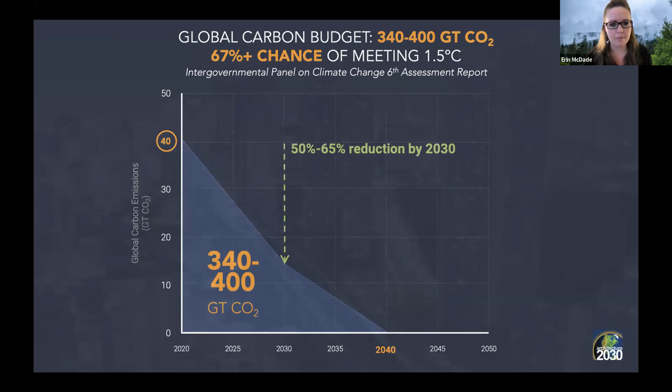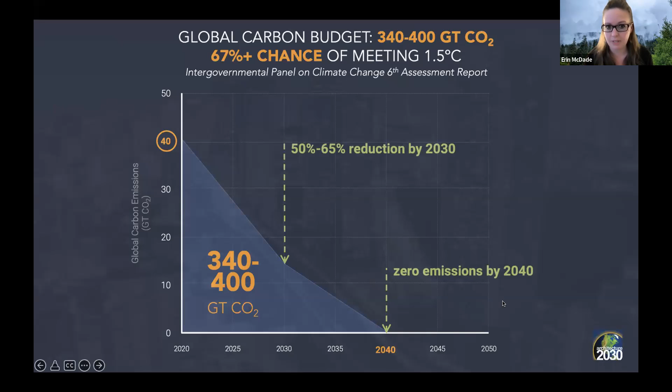So instead, what we are aiming for here is a zero by 2040 deadline, with about a 50 to 65% reduction within the next decade, and then getting us all the way down to zero by 2040. And you can see that if we do this, we hit exactly on that target for 1.5 degrees C. Moral of the story, of course, is that the sooner we get to zero, the better, and 2050 is objectively too late.

Now, the flip side of that climate clock is what they call the lifeline, and that is renewable energy. That is, making sure that we're meeting all of our energy demand for buildings, transportation, industry, et cetera, with clean electricity. And we can see from this that currently the world is getting about 12.2% of our energy from renewables. So we clearly have a lot of work to do, but also a lot of opportunity, right?

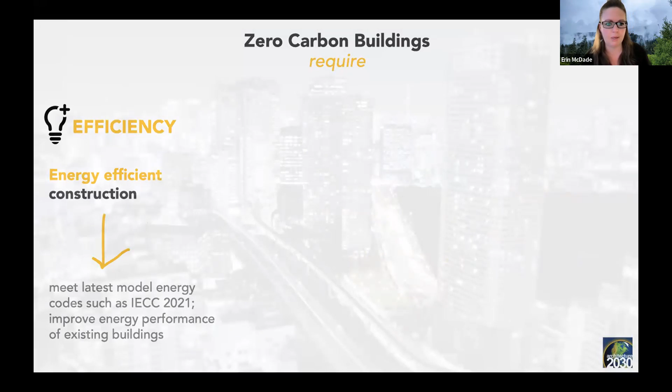So when we're talking about zero carbon buildings, all zero carbon buildings, whether it's new construction or existing, are going to require the same three steps to achieve zero carbon. So the first one is the one we're probably all most familiar with, which is energy efficiency. And so from a new construction perspective, energy efficiency might mean meeting the latest model energy code, such as IECC 2021. I know you're working in Michigan on getting IECC 2021 adopted. And for an existing building, it would be doing an energy upgrade and improving the energy performance.

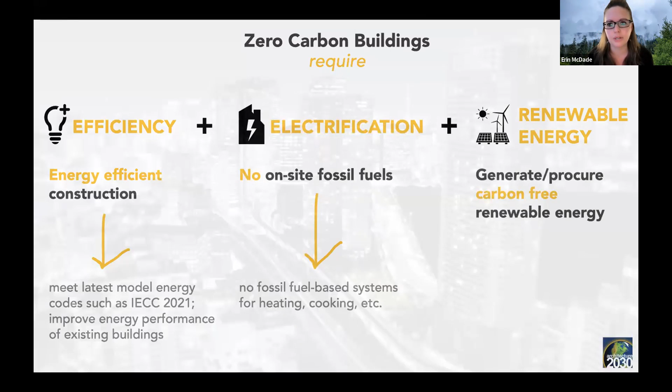Then the second piece, which again, we've all been talking about a lot, is the electrification piece. We can't be zero carbon if we're combusting fossil fuels on site. So using electric appliances in place of fossil fuel appliances. And then the third piece is this renewable energy piece. Once we've gotten the building as efficient as it can be, and we're making sure there's no fossil fuel combustion on site, the energy that we are consuming needs to come from a clean source. And so that is where the generation or procurement of renewable energy comes into play. And this is really the sweet spot of the Zero Code renewable energy framework.

So from a designer perspective, if a policy were in place where designers were required to meet the Zero Code, how does this work for them? It's actually not that complicated. It's set up to be pretty easy. So the first, following those three steps again, design an energy efficient building. And again, the Zero Code is compatible with any energy efficiency code that a jurisdiction wants to use, but is in particular designed to be compatible with IECC 2021. So a designer would meet code, a basic designer requirement anyway. Then we need to determine the renewable energy requirements of that building once it's met code.

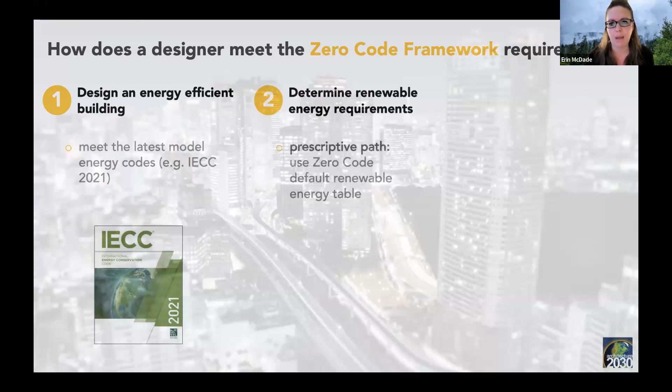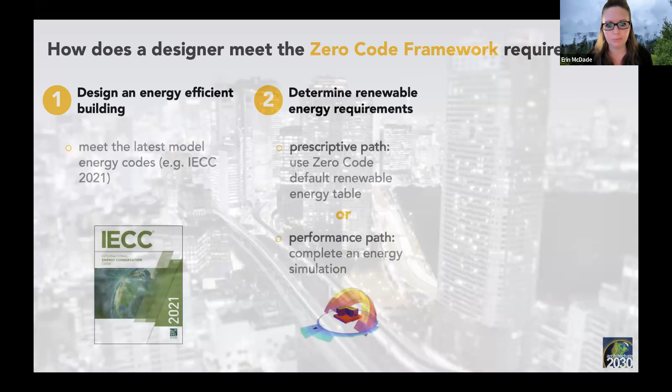And the zero code framework offers 2 different pathways for doing that. There's a prescriptive pathway where the zero code framework comes with a default renewable energy table that tells you, based on your climate zone and your building type, how much renewable energy your building needs to generate and or procure on site. Or, of course, performance path, energy model, figure out how much renewable energy is needed.

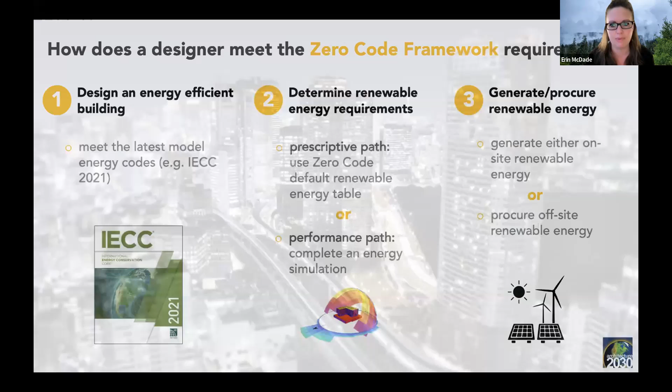And then the next step is just to generate or procure the off-site renewable energy. And obviously that part in and of itself is somewhat of a challenge depending on the geographical and jurisdictional conditions. And so this step 3 of supporting designers in knowing what and how to procure that renewable energy is where the zero code framework is really set up to help policymakers to establish that part and make that part as simple as possible. So I'm going to talk about the resources now here that are really for policymakers and advocates around the zero code for establishing that renewable energy framework within your jurisdiction.

So the first set of resources we have are what we are calling these zero code guide documents, and they're up on the website. I'll put the URL up in a second. We have a series of these that we have developed and a series that are still in development by the Zero Code National Team. The first one, what is the zero code, is just a high level, fairly short talking points memo about the key points of what the zero code is and what it can do.

The second one is the pathways to zero code adoption, and I'm going to highlight this one in a second. But this is one that jurisdictions are finding incredibly valuable, especially at the beginning of this conversation, because despite the fact that we are typically used to regulating this kind of thing through a building or energy code process, there are actually a bunch of zero code adoption pathways outside of the building and energy code process that jurisdictions can and have successfully utilized, including in Boston. And we'll get to hear about that in a little bit more detail from John in a couple of minutes.

And then we also have a guide document on the economics of the zero code, looking at how it impacts costs and what the potential economic benefits for a jurisdiction of implementing a policy around the zero code framework would look like. And then finally, a similar guide document looking at health and equity and the benefits of the zero code from that perspective. And so all of these are online, all of these and more, I should say. There's a whole host of additional resources online at zerocode.org/resources.

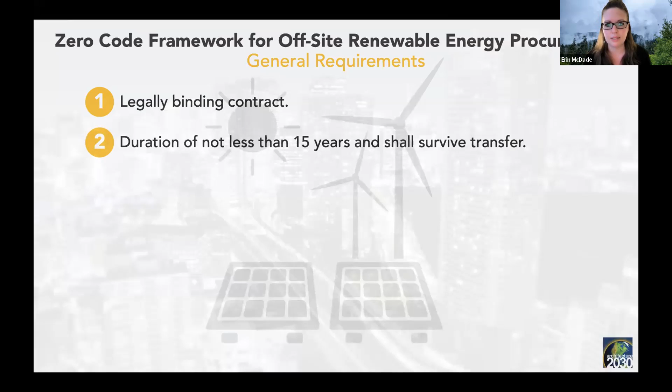So within this technical support document, one of the first things that it covers is the general renewable procurement requirements. And so what this looks like are, regardless of the type of renewable energy that's being procured, the general requirements that we would recommend a policy have in place. And so that includes that the procured renewable energy is in a legally binding contract with a duration of not less than 15 years, and that the RECs or other environmental attributes are assigned to the building project for the duration of the contract, as opposed to being free-floating in the market.

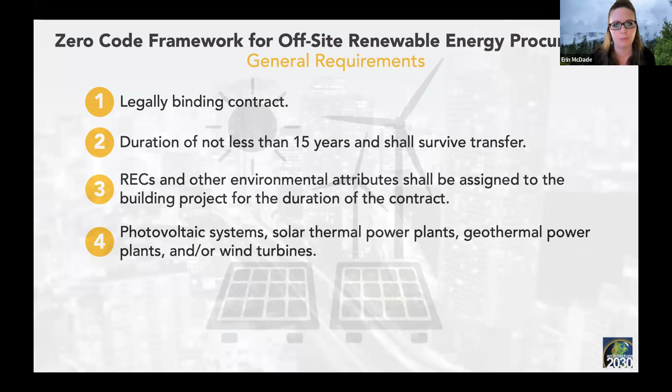There's some consideration about the types of generation that are considered best for renewable energy procurement, that are considered actually to create carbon-free, environmentally friendly energy. The requirement that it's located within the same or an integrated grid service area. And so essentially this is ensuring that additionality, that addition of renewable capacity is within the building's general service area, so it's actually supporting the grid that the building is drawing power from. And then this one's pretty clear, transparent accounting that clearly assigns the production to zero. And John will talk a little bit about how some of these implement from a real world policymaking perspective.

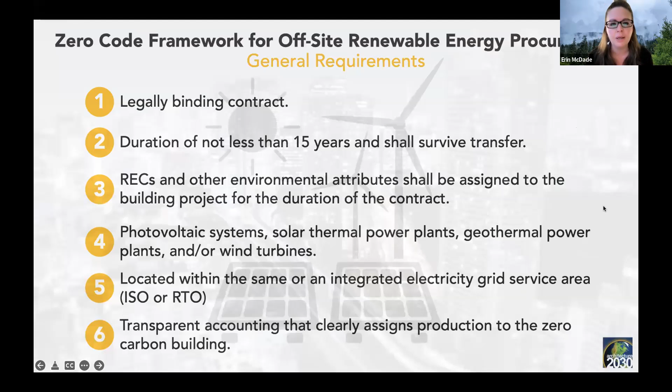And I will say that while these are general requirements, the Zero Code is designed to be plug and play. Everything's already in place. It can be just implemented as policy, especially if coupled with IECC 2021, but it's also super flexible. And so if, for example, located within the same service area becomes too much of a barrier for a jurisdiction for some reason, requirements can be shifted.

So general requirements regardless of the type of procurement, but then a bulk of this document is an in-depth analysis of the actual types of offsite renewable energy procurement that are available to most jurisdictions, and that the jurisdiction is going to be choosing from to make either applicable to buildings within their jurisdiction or not. And I'll quickly list those. I'm not going to go into detail about each of them, but again, there's significant detail about each of them within this document. So it includes direct ownership, community renewables, more commonly known as community solar, power purchase agreements or virtual PPAs, renewable energy investment fund.

This one is actually one that is unprecedented, except for perhaps what John will be talking about a little bit in Boston. We might get to call the first precedent of this. So it's kind of a new concept that the Architecture 2030 team developed in writing the Zero Code, and it's very similar to what we see in a lot of jurisdictions if there are legally mandated affordable housing requirements for developers, and in lieu of building that affordable housing, a developer can pay into a fund that the city ostensibly then uses to build affordable housing elsewhere.

A comparable approach can in theory be taken here, where in lieu of a building purchasing renewable energy, money can be put into a fund, and then in theory that fund would be used to power other clean energy projects. It could be used even to help overcome the upfront cost barrier of existing building electrification for low-income residents, as an example. We also have direct access to wholesale markets, and then green retail tariffs. And then finally, probably the one that most people are actually familiar with is unbundled RECs. Also the one that is probably the least effective type of offsite renewable energy for various reasons. And I'll go into the details of that a tiny bit in a second here.

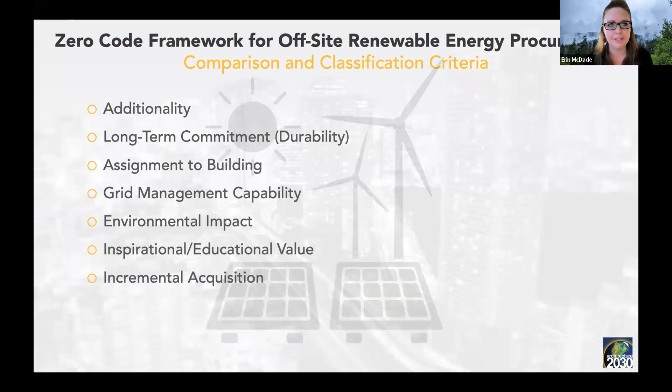The long-term commitment, we talked about the recommended requirement of having contracts be at least 15 years so that buildings can't just opt out. The assignment to the building as opposed to free floating in the market, grid management capability, environmental impact, inspirational and educational value, incremental acquisition ability. Again, all of these are defined in more detail in the technical support document, the ability to have permanent financing.

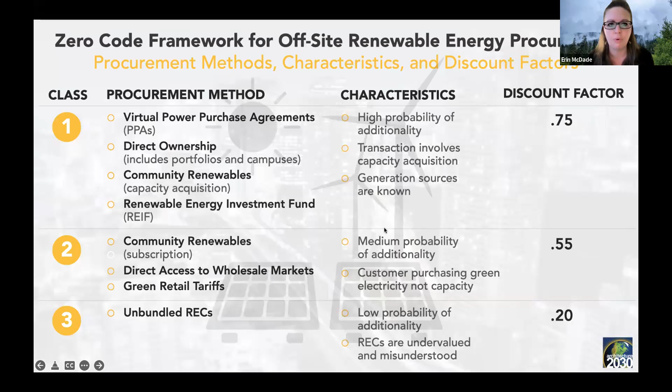So, and I personally, and we at Architecture 2030 think that's completely fine as well. And it's good to have this back end information to understand the impact that these different procurement methods and the renewable energy as a whole is going to have in the jurisdiction.

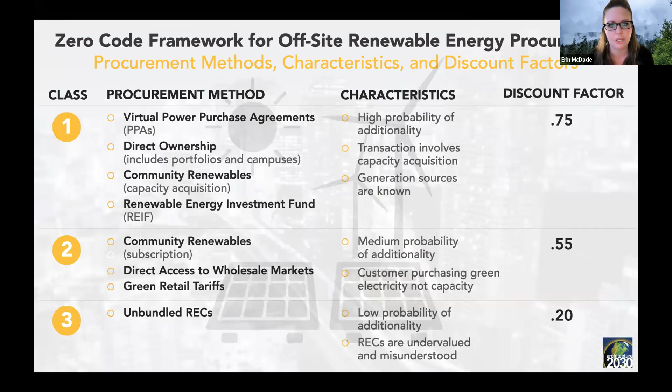And so I'm going to end on really quickly talking about maybe the most simple and plug and play use of the Zero Code framework. And I already mentioned this. So the Zero Code is built into the newest version of IECC 2021 as Appendix CC, which is the Zero Energy Commercial Building Provisions Index. And so what that means is that if a jurisdiction adopts IECC 2021, they can adopt that appendix as well, either as optional or as mandatory.

And either way, optional, it would be incentivized, mandatory obviously would be required, would then be bringing that offsite procurement piece into the energy efficiency elements of the IECC as well. And so just some key features of Appendix CC, again, especially since that's part of the conversation in Michigan. Optional, I talked about, if it's adopted, regardless of if it's optional or mandatory, there would be mandatory compliance with the 2021 IECC, and then the renewable energy requirements built in there if it's mandatory.

Talked about this one, sets a minimum renewable energy requirement based either on a default table, which is in there, or energy modeling. Provides incentives for buildings to be designed to be more energy efficient than code requirements. The more energy efficient the building is, the less renewable energy it has to procure, and the more affordable that renewable energy is. So it incentivizes designers to find that balance point between energy efficiency and procurement.

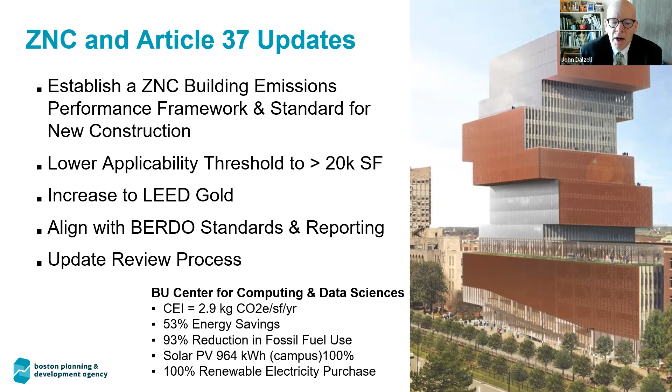Real important for all of this work is we have an existing building emission reduction ordinance, affectionately referred to as BERDO. We also updated this to a carbon performance standard. So for existing buildings, we have requirements that establish carbon emission limits. There's a range of limits depending on the building use, and the limits decline over time. It's scheduled out through 2050, where it reaches zero net carbon for all buildings.

But we know existing buildings, in Boston especially, where they can easily be 100 and 150 years old, present a lot of challenges. New buildings present a lot of opportunities. I'm not sure I can really say that, but in our new building work, we have been able to focus on high performance much more readily. It's obviously a blank slate, and so we have open decision-making opportunities.

Really important, though, is that we're not doing this alone. We're doing this in partnership with our building owner, design, and engineering community, our development community. And so we've been able to work in partnership and really learn from practices that are happening right in Boston.

And so today, by the way, we've yet to finalize our zoning. We're sort of 7/8 of the way through the process. We've drafted our zoning and recommendations and things like that. But more importantly, we've already been applying the framework and practices.

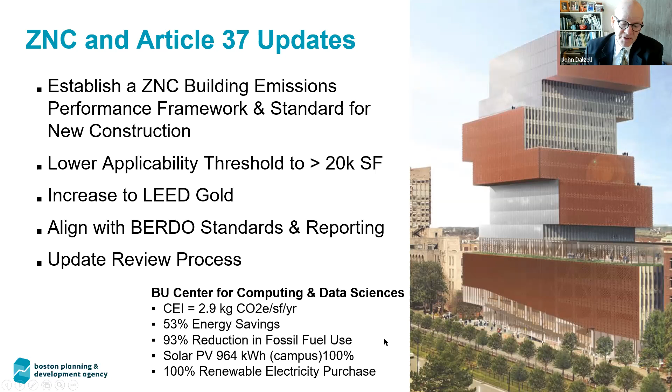I actually think that's wrong. I think this building is now 100% electric. BU already purchases all their electricity from a renewable resource. But just to be in line with our goals, they're actually adding new on-campus solar renewable energy to fully electrify this building or meet its full electrification loads.

We have other projects in the city as well across different housing typologies. And interestingly enough, I really want to give a big salute to our affordable housing development community. They've been at the forefront of practice. I think they really do understand the health benefits of green buildings, but they also understand the value of high performance buildings, especially as it pertains to costs that are passed on to tenants and occupants.

Bunker Hill Housing is a large redevelopment project. There are several buildings there, but without spending any additional money, they were able to design buildings that will achieve LEED Gold. They've cut the energy in half. I don't know if any of you are familiar with multifamily residential practices, but an energy use intensity of 19 is pretty remarkable. And I have to say, we're seeing projects beat that now. We've just signed off on a project with an EUI of 12, and it's not doing anything all that remarkable, just getting a little bit smarter about the synergies between strategies.

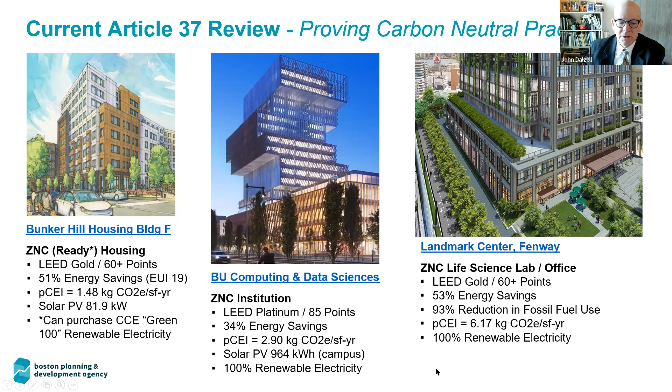The BU building I mentioned, and now, here we go, one more click here. And we also have, especially right now, because life science building development is probably our predominant building type of new construction in the city, recently signed off on a couple of life science buildings where they've been able to achieve 50% energy reductions, LEED Gold or better, and significant reductions in fossil fuel. They've also committed to 100% renewable electricity. So we're seeing great things out of our partners in the city and are able to move forward.

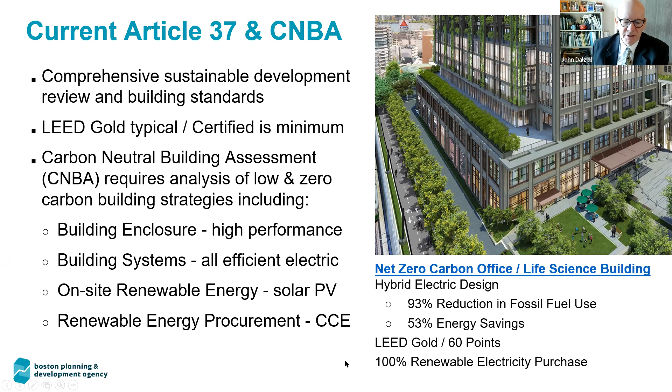Just as a little more background, we have advanced practices under current zoning and regulation. So as I said before, we typically see LEED Gold. We take a comprehensive approach to sustainability. And a few years ago, as we focused on zero net carbon, we introduced a requirement that buildings do a carbon neutral building assessment. This is a great way to start policy, by the way. It doesn't have any formal performance requirement to it. We simply asked projects to assess additional strategies to reduce energy use, or in our case, because of our focus on carbon, to reduce carbon emissions. So that breaks down to focusing on the enclosure, the building systems, including on-site renewable energies, and procuring renewable energy. And there is our framework.

The most complicated part of this work, honestly, has been establishing carbon emission targets for buildings. And so what can we do without making it so hard that projects would leave our jurisdiction and build elsewhere? And so we've worked pretty hard with our development community. What we've found is across the board, we can certainly do a lot better. The framework, again, renewable energy on site, and then renewable energy procurement.

One of the really interesting things, though, that came up during our process was a strong interest in including embodied carbon. This wasn't part of our work plan. We were very focused on operational carbon emissions, but the stakeholders we were working with were quite adamant, well organized, and really well informed. And so, in fact, it turned out to be a really robust conversation. We had, I think, 4 or 5 meetings with hundreds of attendees weighing in on strategies for reducing embodied carbon. So our draft zoning anticipates future practices around embodied carbon reduction.

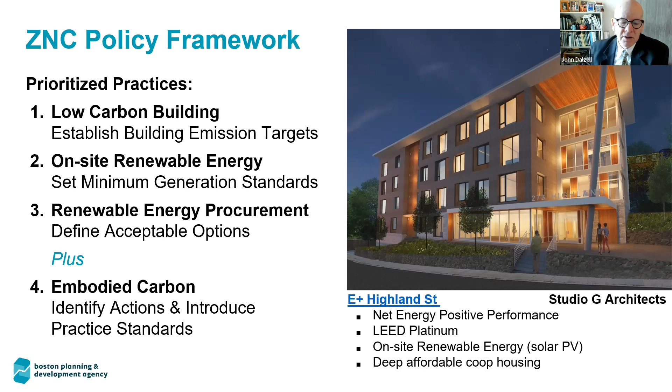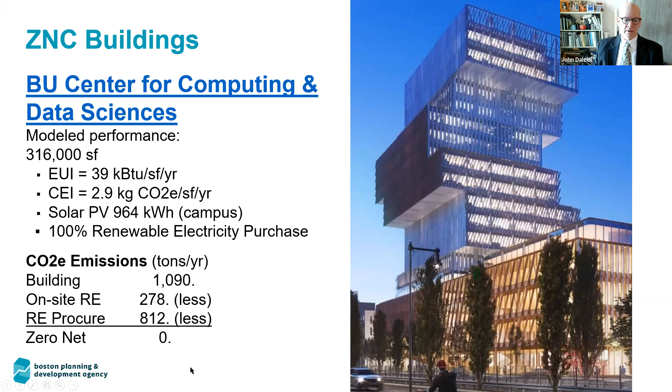What all of this framework measures out to be is, again, a calculation that assesses how much carbon a building's emitting. We reduce that by on-site renewable energy. We identify a renewable energy procurement requirement. And then through our existing building disclosure ordinance, there's an annual reporting on compliance. And so for buildings subject to the new zoning, their limit would be 0, and they would be reporting annually on compliance. So we're able to put our 2 policy pieces together and come up with, I think, a pretty reasonable framework for advancing building practices.

So let me dig into some of the details. I'll go quickly through this so we can talk about things. But first, I want to give a shout out to our partners here, Thornton Tomasetti and BR+A, that worked with our technical advisory group and stakeholders to design a process and conduct a conversation that was really quite technical, but also quite thorough. The recommendations we came up with do establish performance targets based on carbon emissions, but also importantly, the recommendation to stand up an advisory group to continue to review and update those targets.

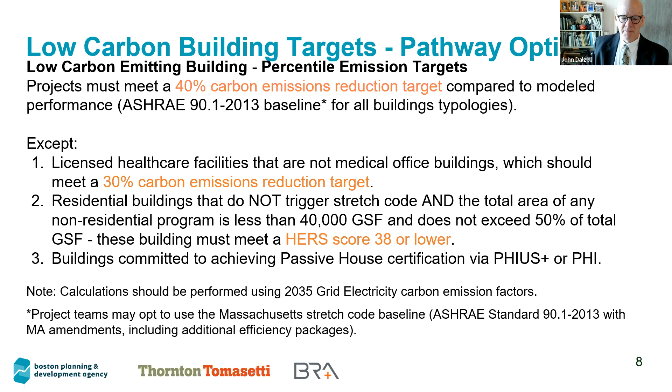The other thing we wanted to do, though, is establish use-specific targets based on our carbon emission intensity. Here's where the world gets a little bit more complex because we now measure carbon in kilograms by square foot by year. And so we're introducing a new metric. It's appropriate for us because we are regulating carbon. And I think it's really important to keep an eye on what it is that you are trying to do. But what we found through a lot of analysis is that we could establish performance targets based on use typologies, and that those would be a much easier way to convey practice expectations to development teams.

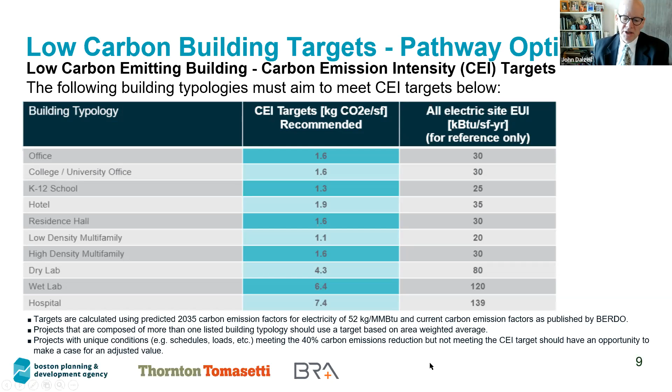It also reflects improvements in the amount of renewable energy in our electric grid. And it biases practices toward electrification, which is part of our strategies for achieving carbon neutrality. So when we measure a building performance out in 2035, if it's relying on a lot of fossil fuel, in our case it's principally natural gas, it's not going to perform that well over time. And so it's been an interesting strategy to keep people focused on best practices.

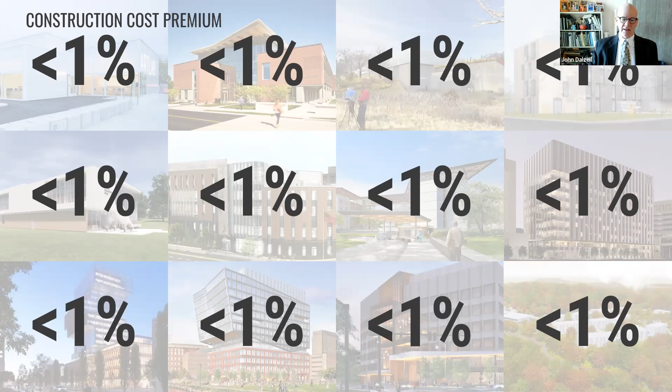It saves you a lot of costs on piping an explosive chemical through your building, by the way, but also interconnection costs with the utilities themselves. So it's really a strategy of trading off costs. And again, what we're finding in many instances is the costs are less than 1%. We're seeing instances where with the utility incentives for high performance, it's actually costing less to build a net zero building. And I think that'll be the narrative of the future.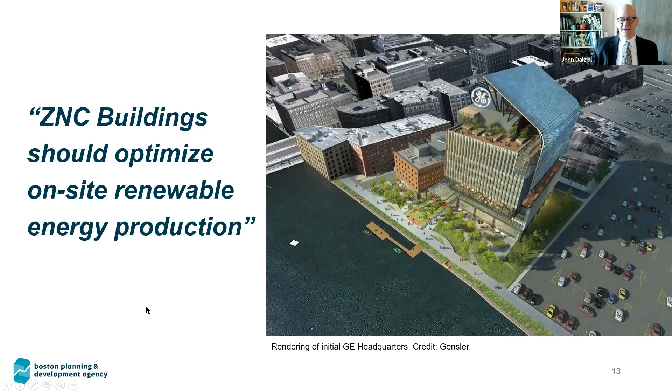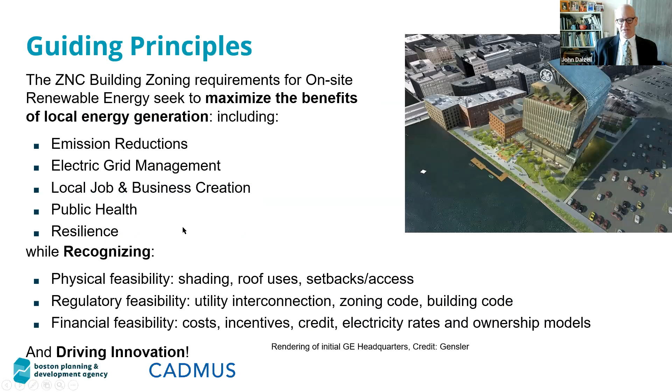When they did scale back, the development partner is building a building there, but they are not building it with this solar veil. They are, in fact, including more solar PV on the building. So it doesn't have to be a dramatic architectural expression to be a high performance on-site renewable solution. Renewable energy for us has lots of benefits, obvious emission reductions, grid management, but certainly local jobs and business, public health, and then resiliency. So real important benefits to be realized.

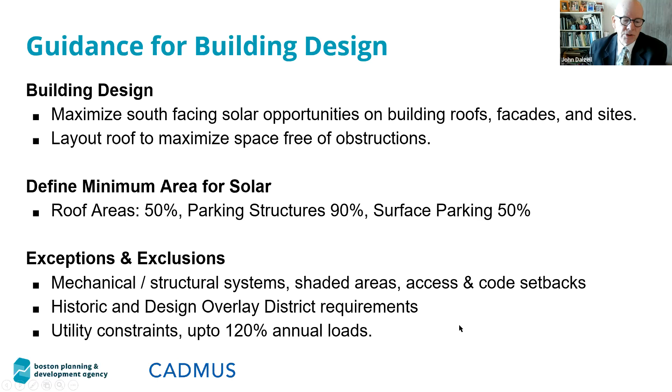We are following what I think are emerging as national practices. So we want to set expectations around building design to make sure that it's considered right from the beginning of the project. So let's make sure we intervene early on in project planning. We did want to define some minimum requirements, but also recognize that there are lots of instances where those requirements can't be met. Certainly when you're building tall buildings with a lot of mechanical equipment on the rooftop, those solutions become much more limited. But we also have historic districts and design overlay districts and other instances where it wouldn't necessarily make sense to or be possible to even achieve a 50% cover of a roof.

I'll go quickly through renewable energy because I think Erin did a fantastic job both in presenting here, but also working with us. And so we do want to and have included strategies and standards for purchasing of renewable energy. We are making sure to align between our new building zoning and our existing building reporting. And we want to make sure through the permitting process that development teams and their stakeholders and partners are fully aware of what's expected of them once the buildings are occupied. So we do require these upfront calculations, even though the costs, if there are costs for renewable energy, don't show up until the building opens its doors.

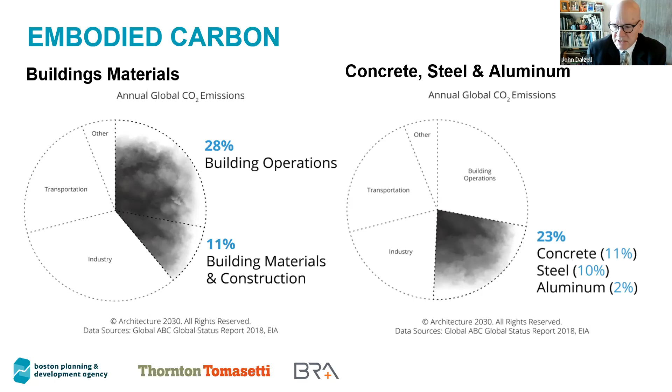When you do look at the embodied carbon in buildings, a lot of it is in the structure. A lot of it comes from concrete and steel. So for our work, we've already started to pilot some practices, and that's an important thing when it's early on. So we've created a mass timber accelerator program. We clearly understand that swapping out steel and concrete for mass timber that's regionally harvested is a far lower carbon intensive means of building buildings. I think all of us can find various solutions like that.

We do have some really interesting ones as well, like working at the municipal and state level to collaborate on standards for, for instance, low carbon concrete. How do we make sure our concrete batching plants can offer product to the private sector that reduces the carbon emissions? And so I think we can do that through our buying power, through what we specify in state and building contracts, but also through our leadership, just being right there, having the conversations and pursuing that kind of advocacy.

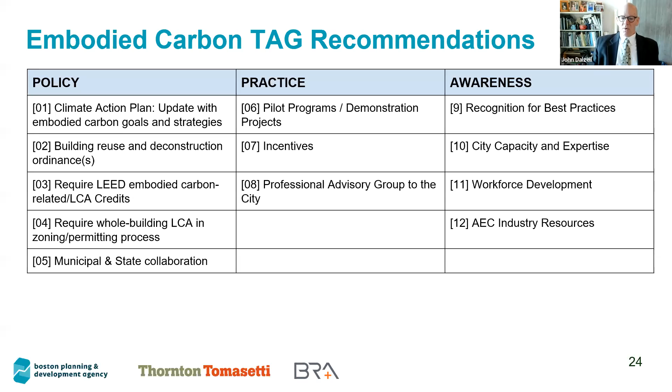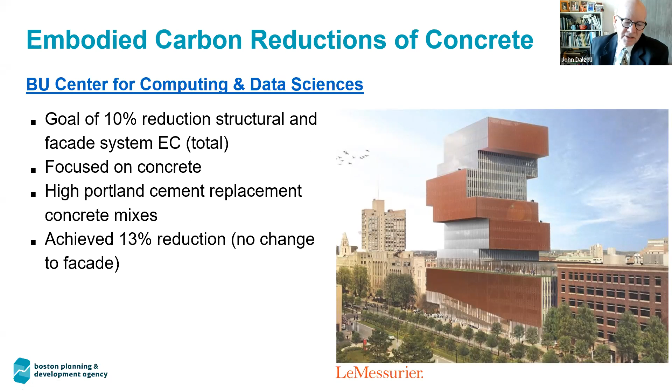So I will stop. I think that's my second to last slide. Here we go. Boston University, once again, showing us the way. Without spending any additional money, they were able to reduce the embodied carbon in the structure and facade by 10%. So overall, 13% reduction. And again, no change in the building design, no added costs. It just reminds us what's possible when we put our minds to the work.